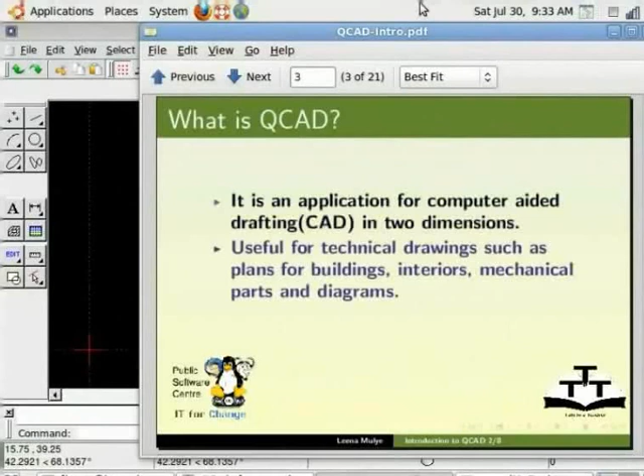QCAD Community Edition is available for download at this website. For this tutorial, I am using GNU Linux operating system Ubuntu version 10.04 LTS and QCAD Community Edition version 2.0.5.0.

If you do not have QCAD installed in your system, you can do so by going to System, Administration, Synaptic Package Manager. At the search box, look for tool QCAD and download the following applications. To know more about how to install applications using Synaptic, please refer to the spoken tutorial available on this website.

Once installed, to run the application, go to Applications, Accessories and Terminal. At the prompt, type QCAD and hit Enter. This will launch the application in 10.04 version. For other Ubuntu versions, it is available under the Applications menu.

In this tutorial, we will see menu items in toolbar, drawing objects, snapping tools, and using layers.

A typical QCAD window looks like this. It has a standard menu bar on top. Options like draw, dimension, modify, and snap are QCAD specific. On the left side is the toolbar, which is used to draw objects. At the very bottom is the status bar, which displays various information about the current drawing.

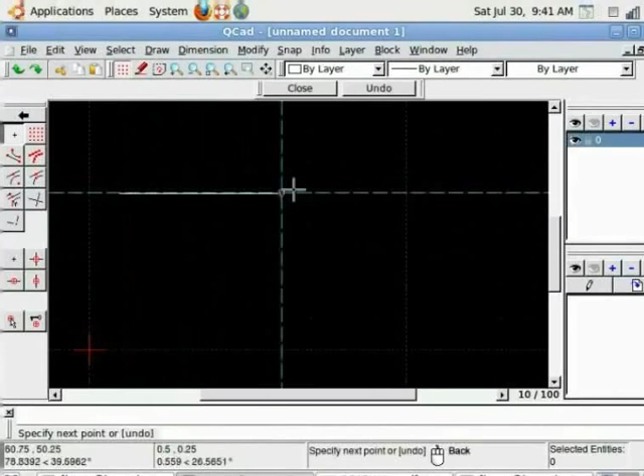Notice if I keep clicking further, it will keep on drawing the line because QCAD is still in line command. For this, I need to come out of that command. To come out of any command, you press either enter or escape button from keyboard twice, or double click the right mouse button, and you are out of any command.

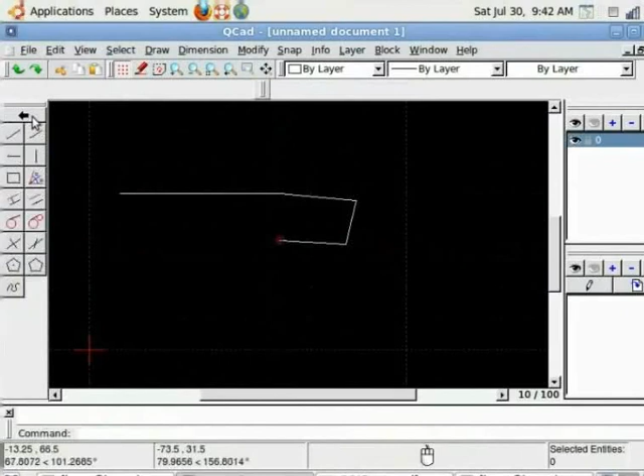Similarly, you can draw parallel lines, vertical lines, horizontal lines, and lines with a parallel distance. Let us see this option. When I choose this option on top, I need to specify the distance between the lines and the number of lines. Let's say 10 here, and number of lines I want, 2, 3.

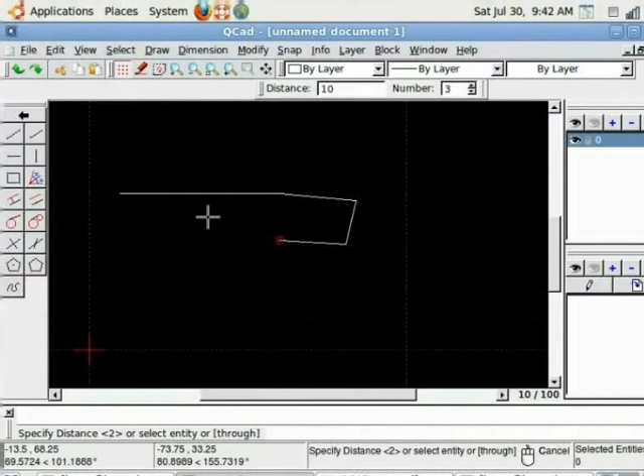Enter. Now you need to move the mouse cursor closer to the entity in relation to which you would want the lines to be drawn. Once satisfied, I can confirm the selection by clicking on the left mouse button, and lines will be drawn on the board.

Now let us see the arc tool. From the toolbox, select arc. I am using arc with center point and angles.

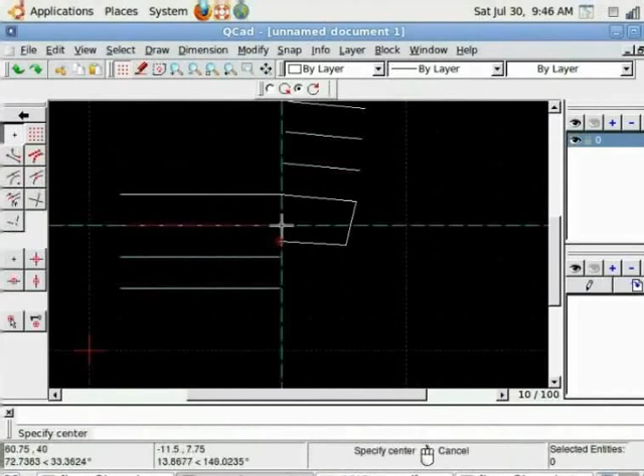Choose from the snapping option, choose snap to grid. Notice the command prompt is asking to specify center. Left click the mouse button to specify the center. Now it is asking to specify radius. I can press 30 and specify the start angle. Left click, again left click, the arc is drawn.

Double click the right mouse button to come out of that command. Let's try and draw a circle. Go to the circle icon from the toolbox, click on it.

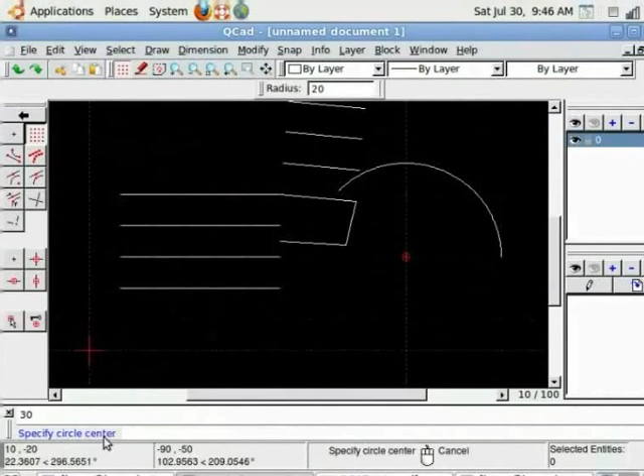I am using circle with center and radius. Click again, from the snapping option, choose snap to grid. The command line is asking to specify circle center. Go on the grid and left click to specify the circle. Circle is drawn, because it is drawn with the previously specified radius.

If I want to change, I can change and draw a new circle with a different radius.

Unless you come out of that command, it will keep on drawing circles. So double click the right mouse button and you are out of that.

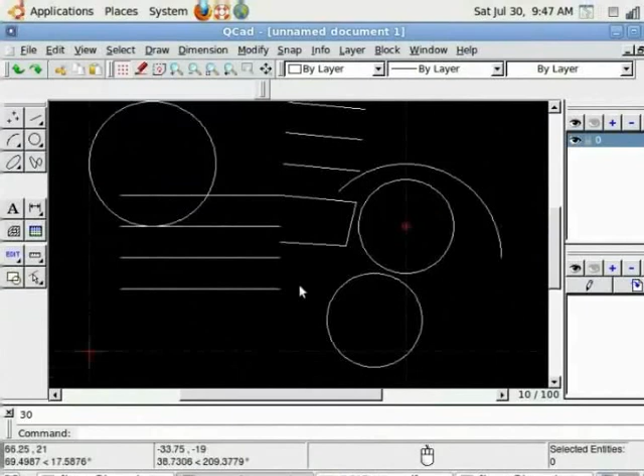Now that my drawing has become busier, I can use zoom. From the top menu, go to View, Zoom In to see more details, or View, Zoom Out to see the wider extent. Zoom is a very essential command because it's useful when you draw details. Similar effects can be achieved by rolling the middle mouse button to zoom in and out, or I can use View's third option, Auto Zoom, to fit the drawing in the given area.

Let us try a new drawing file. Let me clear this area. For this, I click at one corner, select, and then from the top menu go to Modify, Delete Selected.

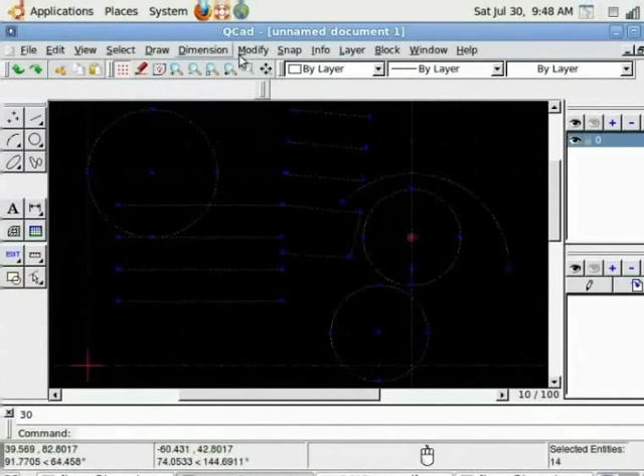Every drawing in QCAD starts at the absolute 0,0 position, marked by this red cross hair on the drawing area. Every other point is drawn in relation to this absolute 0,0 point.

Before starting any drawing, it is important to set drawing preferences to let QCAD know which units you are using and what grid size you would want.

For this, you go to Edit, and there are Application Preferences and Current Drawing Preferences. Application preferences apply to the entire QCAD application rather than just a single drawing. You can change background, grid color, meta color, language, or set the specific unit that you want.

Default unit, let's say meter here, and click OK.

Now let's go to Edit and set Current Drawing Preferences. These apply to a particular drawing, and notice that once you close the drawing, these need to be set again.

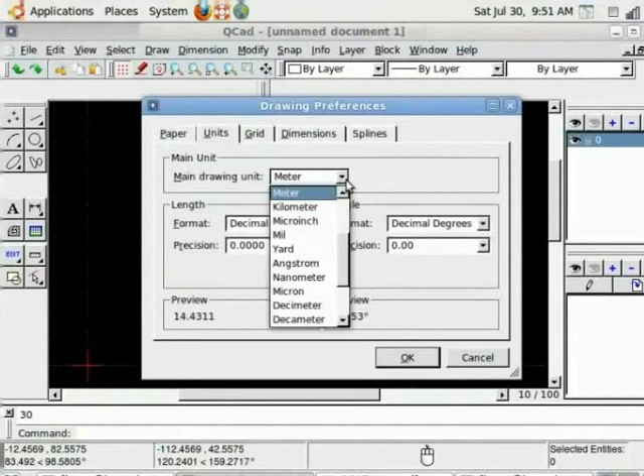Paper settings apply only when you want to print. Units, you can set the unit for that particular drawing, let's say inches here. Decimal precision can be 00. Grid, you can choose to show or not show the grid, or give a grid size, say 0.5 by 0.5, the specific size I want.

Dimensions are useful when you want to start dimensioning on the drawing. Extension line, text height, all these points matter when you want to show the text height. If you think the text height, line, or arrow is too small, you can always come back and visit this area later.

I'm just setting some things now. After you are done, click OK. It's better to save the drawing before we start.

So let's say File, Save As. You choose the directory. I'm choosing home/leena, and I want to type QCAD DWG. Notice it saves in DXF format, drawing exchange format, which is QCAD native. Click on Save. It saves the drawing.

Let us start with our drawing. We will draw a rectangle and then cut it in half by drawing a line in the middle, and draw a circle exactly in the center.

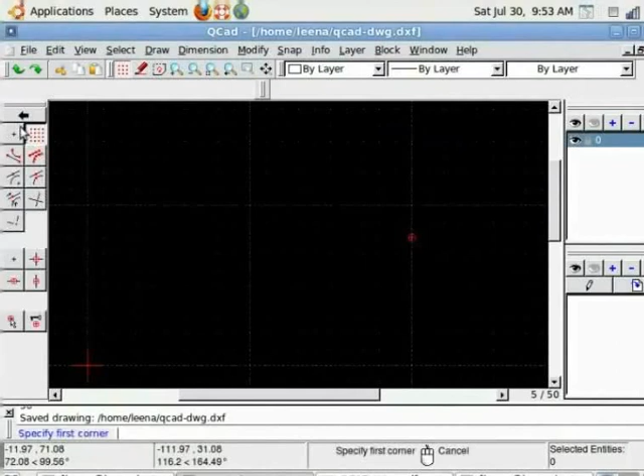Let's start with the rectangle. For this, from the toolbar go to the line option, select rectangle. From the snapping options, choose snap to grid. Move your cursor over the drawing area and left click for the first corner of the rectangle, and click away for the second corner. Rectangle is drawn. Double click the right mouse button to come out of that command.

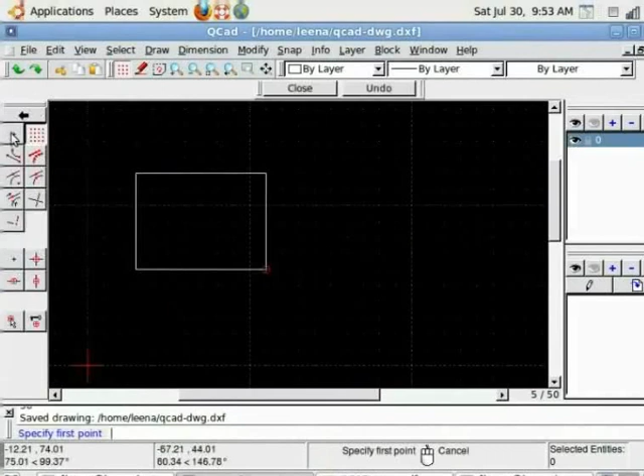Now we want to draw a line exactly in the middle, cutting it in two halves. This is where snapping options will be useful. Let's click on line with 2 points. Since I want it exactly at the middle, I choose snap to the middle point, and I go on the top line. Notice it is snapping exactly to the middle point of the top line. Click there. Go on the bottom line, click again. The line is drawn, cutting the rectangle in two halves.

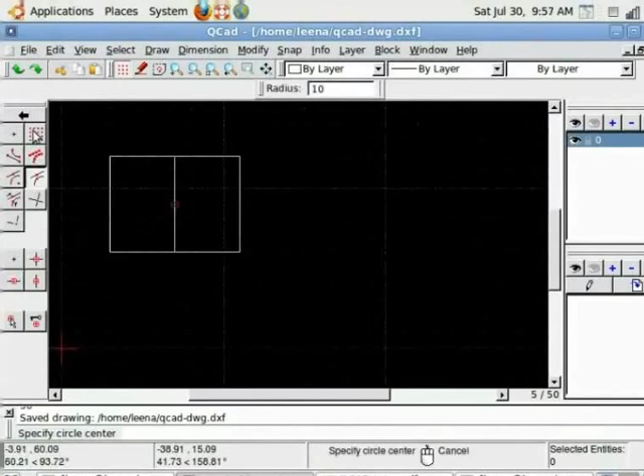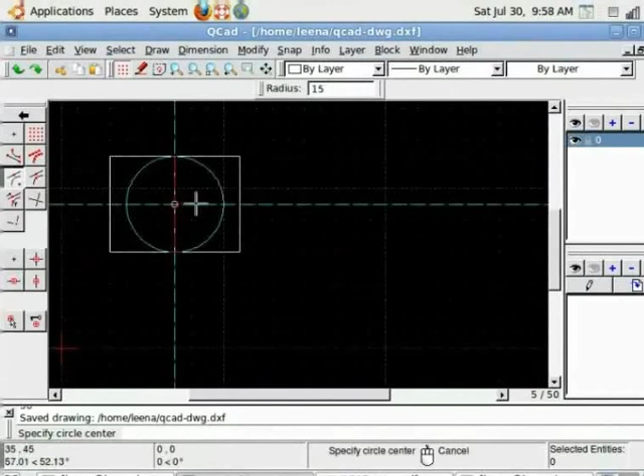Now let's draw a circle in the center of the rectangle. Click on the circle icon, choosing center and radius. I know my grid is 5 and there are 6 divisions, so my rectangle is 30 by 40. So I put radius 15 to cover the entire width. I need to click on snap to center point and left click to confirm. The circle is drawn exactly in the center of the rectangle.

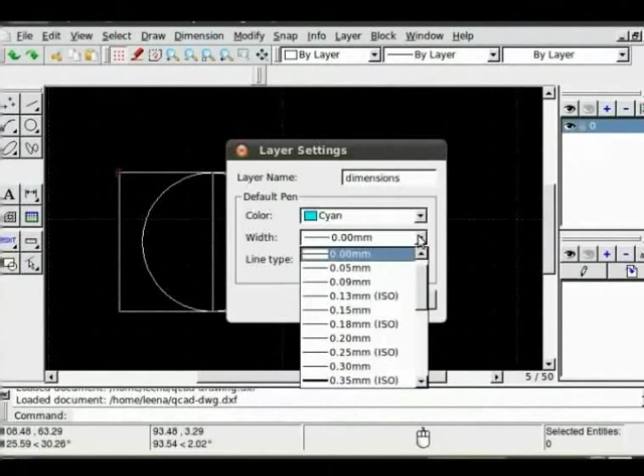Now that our drawing is ready, let's add dimensions. We always add dimensions to a new layer so that we can keep it separate. Go to the plus sign to add a new layer, go to dimensions, and give it a different color so we can identify it separately from the rest of the drawing. You can use type dash.

Then go to Dimension, Horizontal first. From the snapping option, choose endpoints. Click on the first point of the line, then the second point. Now to place dimensions away from the line, from the grid option I can use snap to grid or free positioning and place it away.

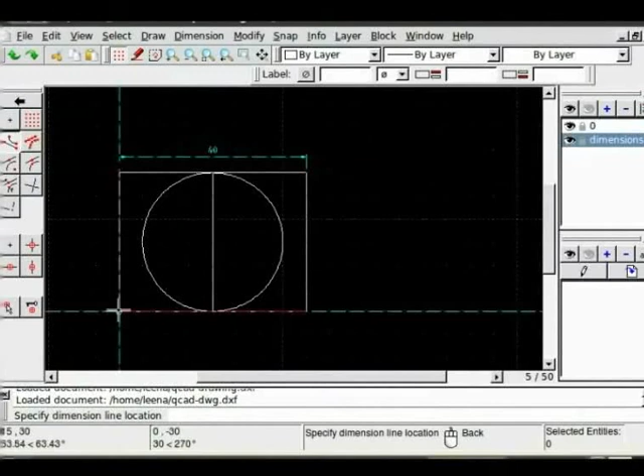Left click once. Again, to place vertical dimension, go to Dimensions Vertical. From the endpoint, place it again away by using free positioning.

This way, if I have it on a different layer, I can always, when the drawing gets busier, click on this eye icon to hide the layer and see the drawing clearly, and when I want it back, click the eye icon again.

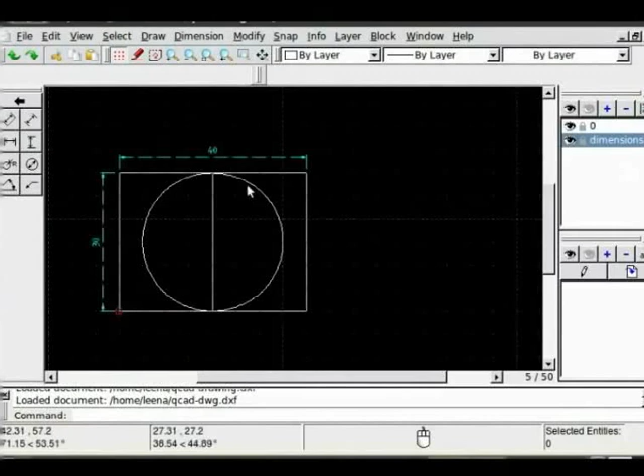Now if I want to change attributes of any object, I click on that object, go to Modify Attributes. Once the selection is made, click on the arrow. Let's say I want to change color to red, increase the width, and the type, make it dash and dot. Okay, the attributes are changed.

Let's save the drawing.